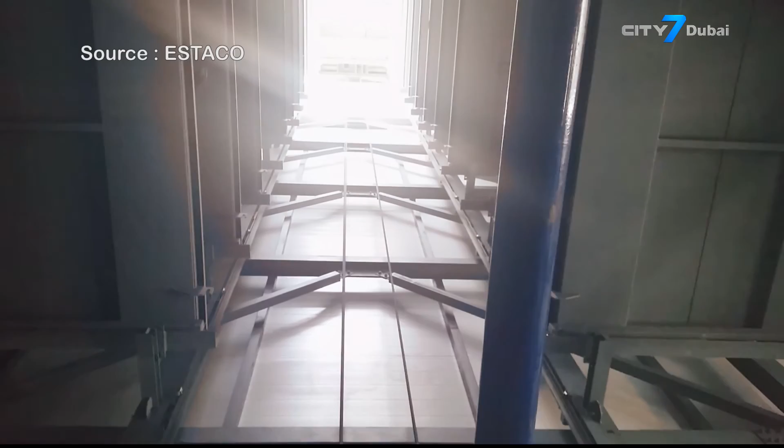In Medellin, we had a shopping mall, and they sold an anchor store for the shopping mall. And local authorities required them to build many more parking spaces. So they gave us only 7 meters by 35 meters to build a parking system for 210 vehicles. In that footprint, it was almost impossible, so we found a way, just like a cigarette box, to solve the requirement they had.

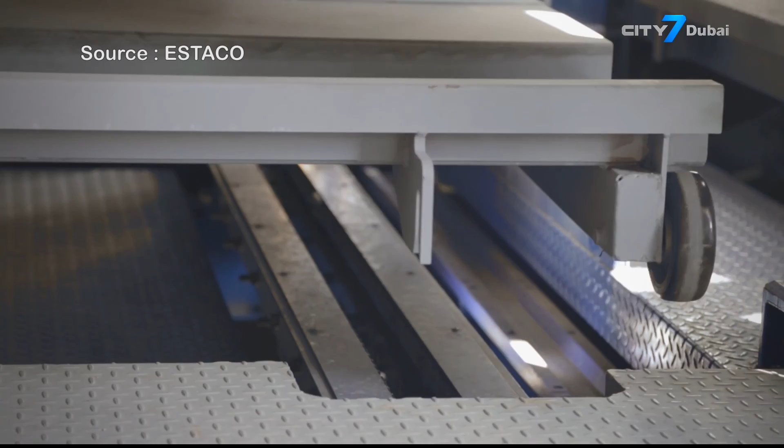We had to solve many problems because it's a tower located on top of an existing building, so we had to reinforce that building, and it was really hard because we have 2 more seismic codes after the original construction, so it was really hard to reinforce from the basement to the top of the concrete building to support the new tower.

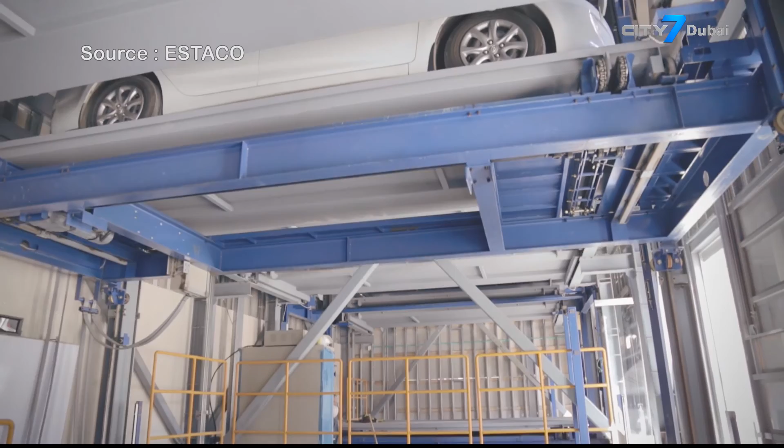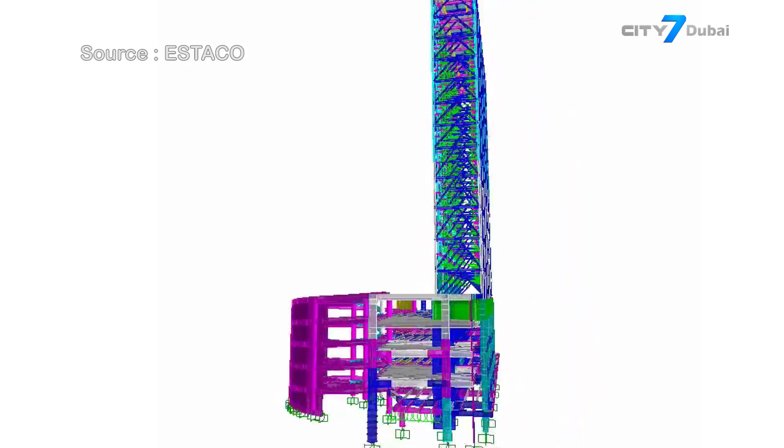In this case, we had to interact with concrete designers, local authorities, construction company, and us. And we had to develop macros to share the information between different packages, different software, and this application was the best and the tool selected by local authorities to solve the situation. So it was required a good tool, and this one was perfect.

So it was an amazing project, and it was an amazing solution, and now we are building 5 more systems like this one in Colombia.

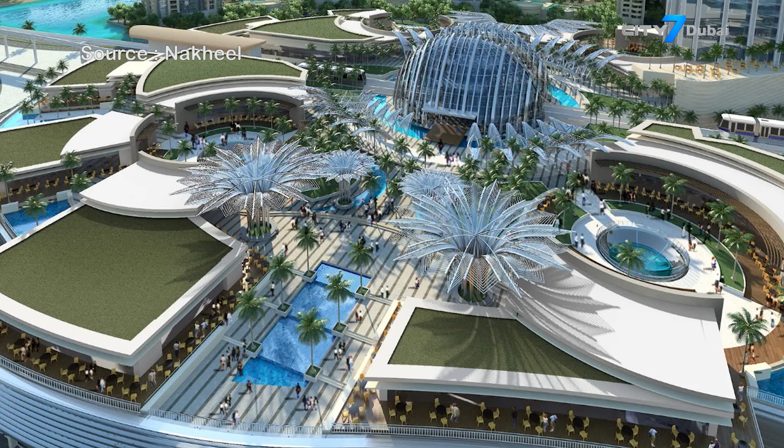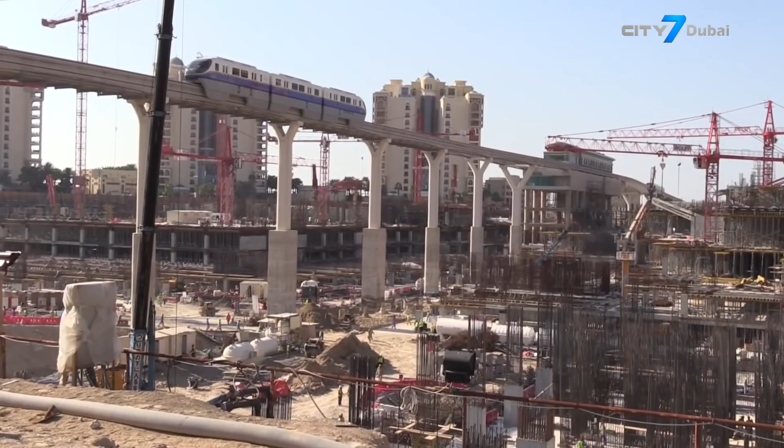And in Dubai, a city known for pushing the boundaries of design, on the already iconic Palm Jumeirah Island, steel contractor Rasana were able to realise the ambitious Middle Eastern-inspired structures that make up the Nakheel Mall project, a complex that will include a hotel, shopping, cinemas and medical and fitness complex centres, all linking to a monorail station and 4,000 underground parking spaces.

This project is a mall project. The name is Nakheel Mall. The client is Nakheel, which is one of the leading property developers in the UAE. There are some concrete structures, which is mainly into shopping, car parking and all.

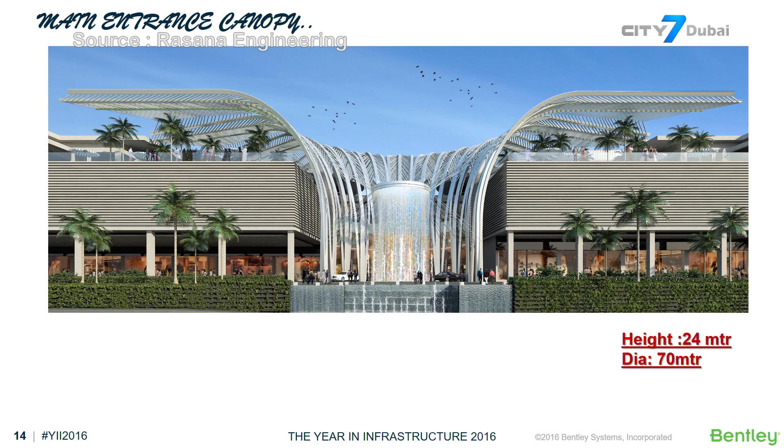And on the top of that, there's a space called Roof Plaza. So there are the steel structures all there. So we, as a steel contractor, we are doing those steel structures.

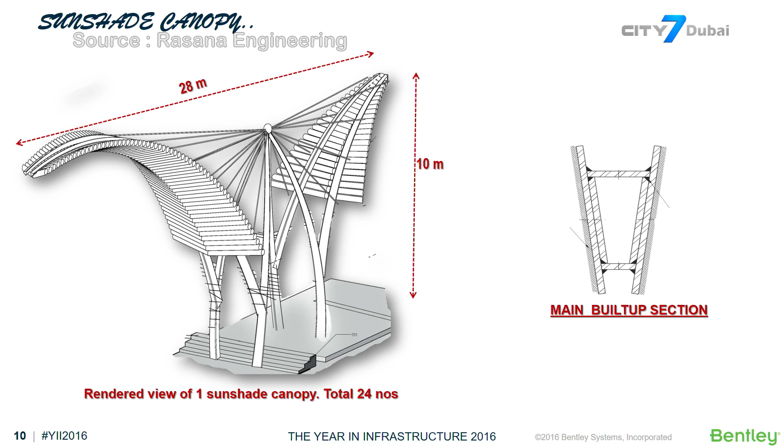So we were given only 3 months for the complete design, getting approvals and all. So completing this project in 3 months was the biggest challenge we faced.

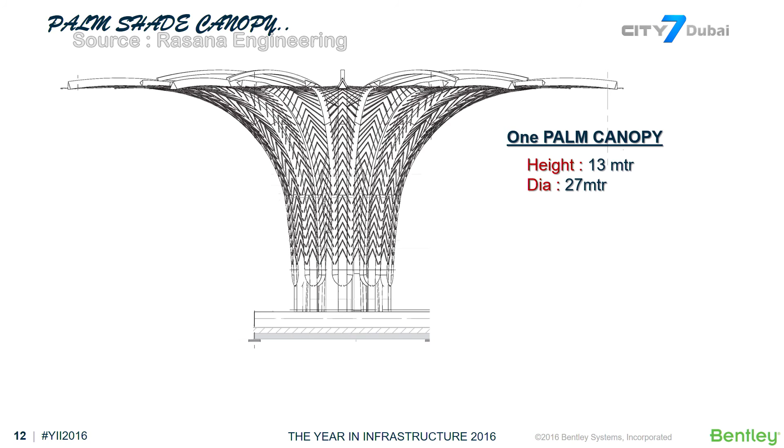So as we were using STAAD.Pro from Bentley, which is very interoperable with many other construction softwares, we could easily export the basic structural geometry from different detailing softwares into STAAD.Pro. So we saved much time in that, and that's how we solved the time constraints and all.

While the functional contribution of many projects, both to its operators and occupiers, is the primary concern of most designers, increasingly environmental factors come into play.

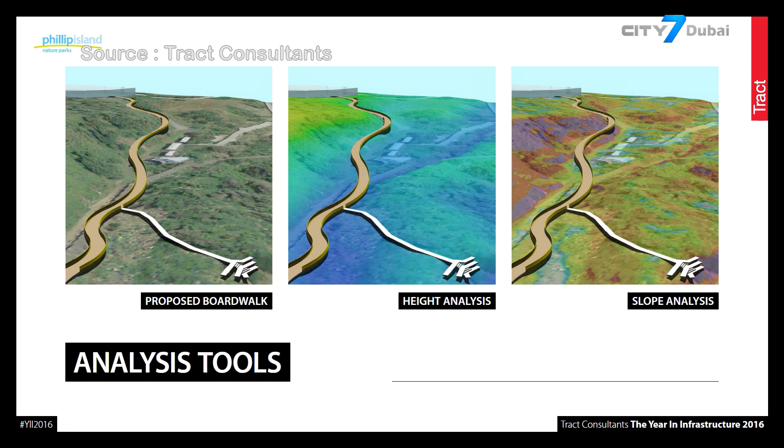The Phillip Island Nature Park is home to Australia's #1 wildlife tourist attraction, the Parade of the Fairy Penguin. In an effort to facilitate ecotourism to the site, as well as preserve its delicate environmental balance, the expansion of the trail system at the destination required the use of complex digital mapping capabilities. The Penguin Parade viewing experience is down in Phillip Island near Melbourne in Australia.

It's where the penguins come out of the water every night, and everyone heads down and gathers over the decking. There's an underground viewing experience as well, so everyone experiences when the penguins come out of the water. They call it the penguin parade — the parade of penguins marching out over the beach and past the structure, and everyone follows along the structure, seeing their migration as they waddle up to shore.

It's an experience that's been sentimental to locals for years. It's been around since, I think, the 1920s.

This was a landmark project for us because the location on Phillip Island is a central tourist destination. With the encumbered site and land topography, traditional methods meant we had to rethink how we did things. The structure's there because the penguins come up, and the penguins were still coming up every single night during construction, so we had to make sure we weren't impacting them at all, moving out of their way — which from a construction management point of view was a challenging factor.

From a design point, it's in a dune location, so we had shifting dunes and penguins shifting all the time too. We needed to be agile and adaptable to change the design should a penguin decide to put a burrow exactly where we wanted a viewing structure or footing, so we had to be quite adaptable in both design and construction management.

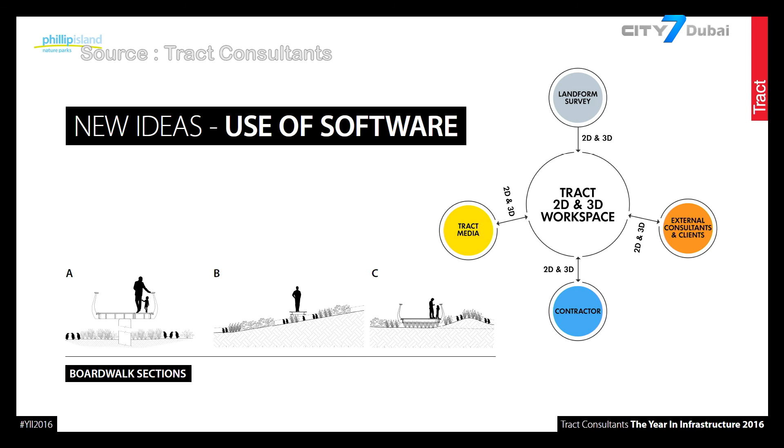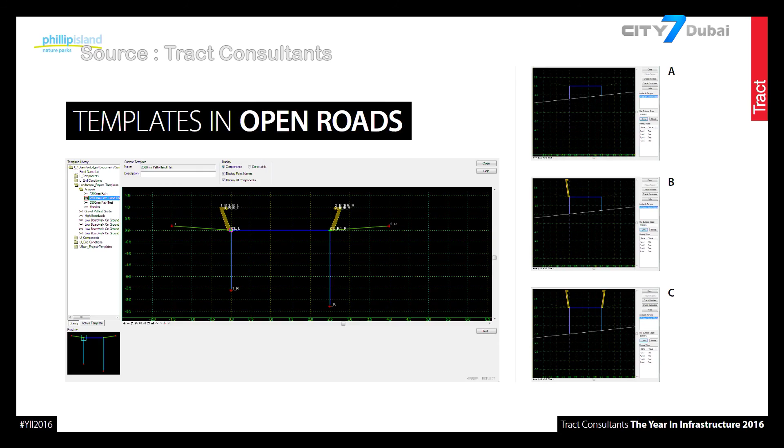We've seen a massive shift from using 3D modelling software only at the end production point, to being able to use it at the concept stage to communicate and collaborate with key project stakeholders, including the client, on what options we can do — often showcasing how some options don't work, especially with the slope and height analysis tools we can utilise. It's a far greater communication tool, and it's proving more valuable in costing out designs.

Digital mapping and modelling has become an increasingly vital tool, used not only in construction but also popularised in apps by Google, Apple and Microsoft. The fact that these technologies filter down for consumer use is in some ways thanks to the groundbreaking work by the city of Helsinki in Finland, who have used 3D data for city modelling since 1985.

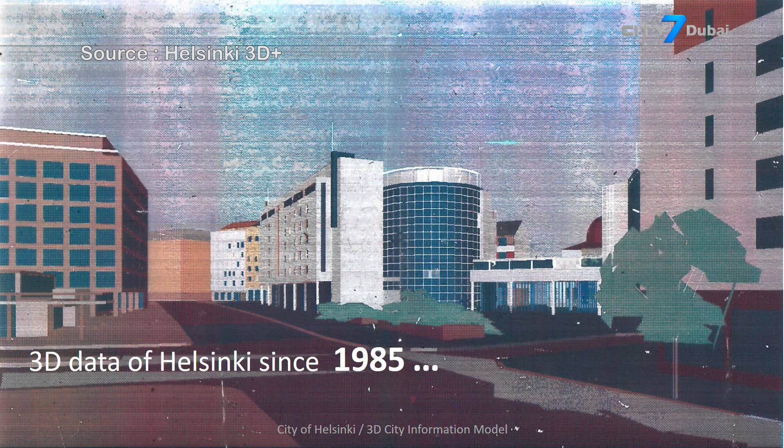As part of a 3-year project to generate a 3D representation of the entire city, when completed the model will provide data to help manage the growth and development of the city well into the next generation.

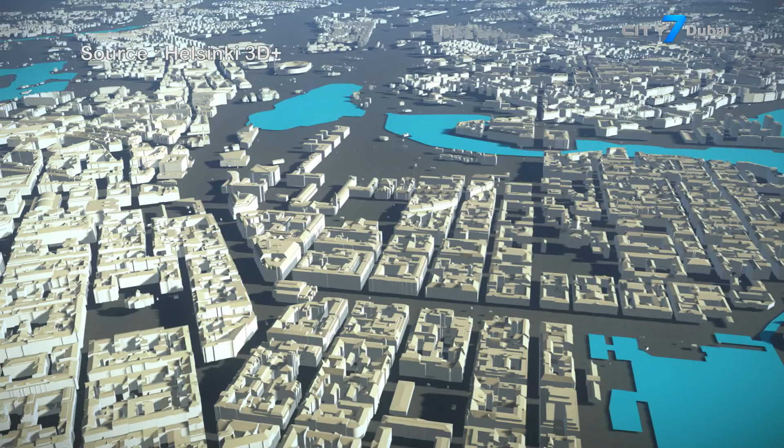We have worked over 30 years with 3D city models in Helsinki, with traditional geometrical models. The challenge now is to make the new generation models, CityGML, with a database and semantic data. It's very demanding because the data quality must be very good — it's kind of a leap in the dark. You don't know what to expect when you're doing a new kind of model.

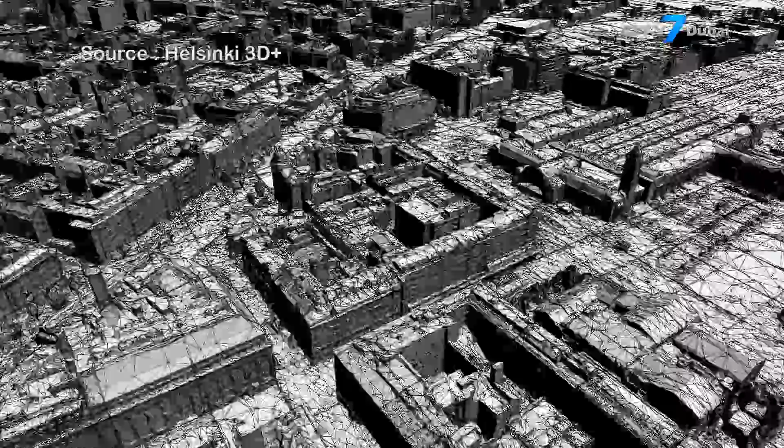The mesh model is also very new to us — so much raw data, so much calculation, so much computing. But the results are, I think, very satisfying.

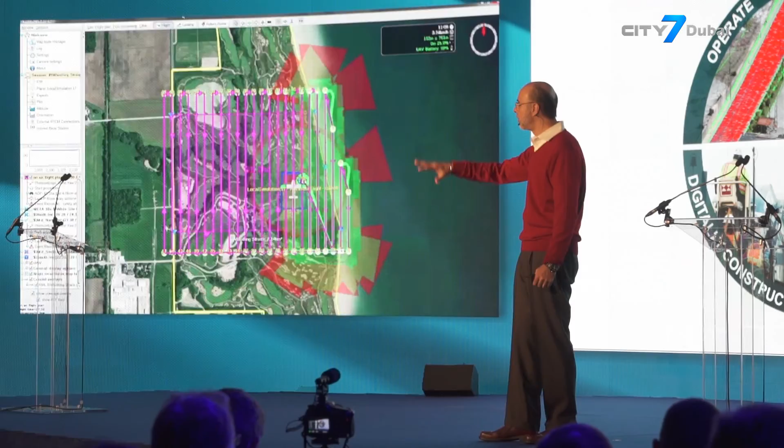If you think about development over the last 10 years, it's huge in every branch — laser scanning, computing, web services, web service standards, city model standards — so we're getting more and more new geodata. Our cars are scanning the city. We get new geodata from cars, from smartphones, from every gadget — Internet of Things, collecting data, big data.

And we are going towards real-time city models. The city models are not static, they're changing all the time — it's a smart city model that knows what's happening in the city at every moment, constantly changing.

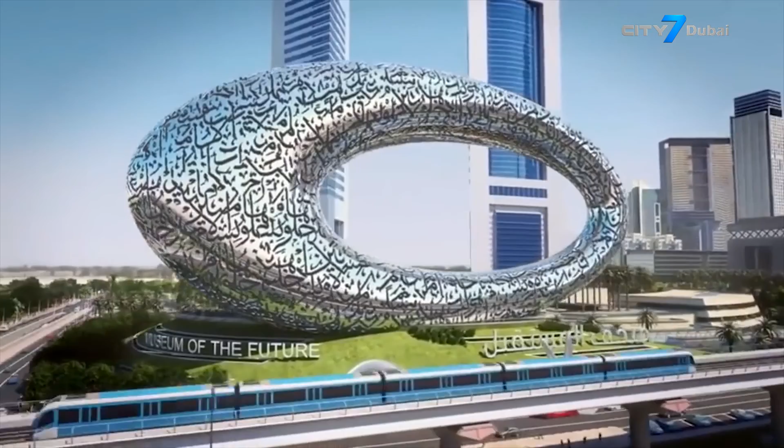Each year brings with it engineering feats and accomplishments that redefine what we thought was possible. With the steady march forward of digital technology and innovation, this year's event has demonstrated that for those building the cities of tomorrow, we are fast approaching a time when the only limit will be what can be imagined.